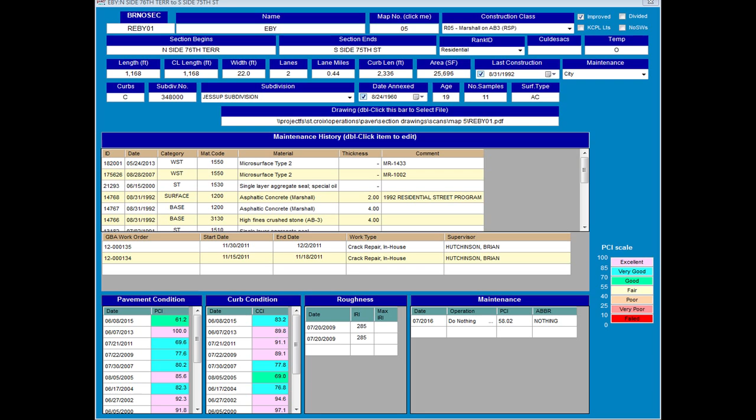So for that section we just looked at, this is a condition plot over time. The x-axis is years starting in 1970. We don't have any condition data until the mid-1980s, so that's why the red line goes horizontal across the top. There's a purple vertical line right in the middle of the plot, and that was a reconstruction of that street. And you can see in this particular example, the reconstruction was very effective.

The red dashed lines near the right part of the plot are microsurfacing treatments. So you can see as the treatments are applied, the impact it has on the street condition. And what we found with our microsurfacing experiment was it was a bust. It wasn't effective, so we stopped doing that.

And on the right side of this plot is the now line, which is today. There's a condition point to the right of it, which would be in the future, and that's a projected condition. And you can see, even on that little short line there, that model is actually fairly accurate for this street section. It tracks pretty well the condition over time.

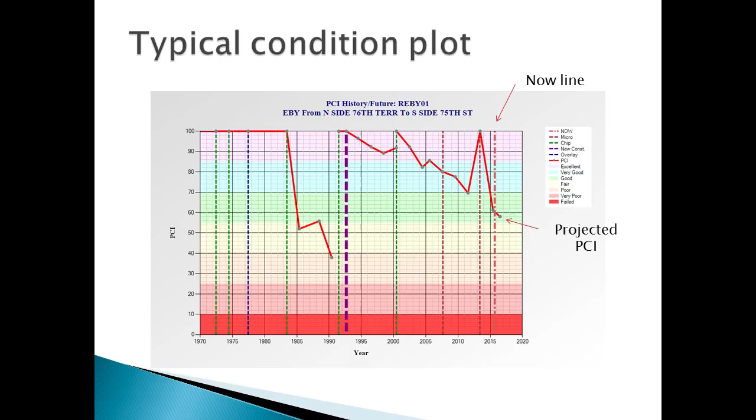There's a spike because the PCI was measured a week after the microsurface was applied, so you got that blush of goodness that rapidly went away. But that's a typical condition plot.

We photograph every sample, and we added that to the application because we could. It's an Android. It's got a camera. It's got GPS, so we're capturing GPS data. And we go, what the heck? We'll take a picture of the sample as they inspect it.

Turns out that is one of the best tools that we have to actually take photographs of these streets as they are inspected. So we photograph every sample, and again, we're doing about 15%. A sample is about a 100-foot hunk of road. So we might do 3, 4, 5 on a typical residential street section.

The measurement process we do with engineering students, recently mostly from KU and K-State, although we'd welcome Rolla, UMKC, anybody else that wanted to work for us over the summer. Last summer we hired 10 college students, 8 of which were Paver inspectors, and we pair them in teams of 2. We rotate their partners every week so as not to introduce bias between the teams.

And at the beginning of the summer when they start, we spend about a week calibrating the teams. We go out and inspect the same street sections. We pick streets that would have a fairly rich set of distresses, and Paver has 19 asphalt distresses and 19 concrete distresses.

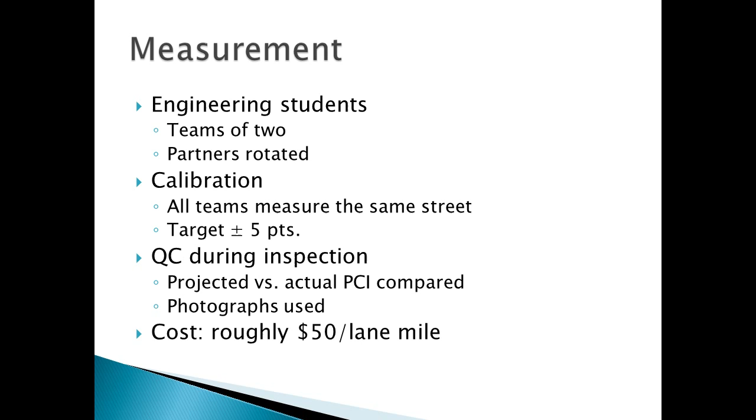In terms of Overland Park's pavement preservation philosophy, our philosophy is that you need to, number one, keep your good streets good. Secondly, you need to identify streets that have been used beyond their useful life.

Are you guys mostly DOT guys? City guys? Any city guys? Am I the only one?

One city guy. Thanks. I think DOTs generally, when they design a highway, tell me if I'm wrong, you design it for a design life, and then you probably operate it for that design life, and then your state legislature makes you operate it for another half again of its design life. So in Kansas, that's about 30 to 45 years for a highway. Cities, given the budget that we're given to rebuild them, you design a road and you build a road, they expect it to last about 300 years.

So we have a number of streets that have gone beyond their useful life. We have a number of streets that have survived for reasons that we as engineers cannot explain. And then our third priority would be to rebuild as the budget allows. Streets that have lived beyond their useful life, we rebuild those. The problem that most cities have is the politicians say, well, this street is terrible, you need to rebuild it. You spend all your money rebuilding the street and then let your good streets go bad, so that all of them need to be rebuilt.

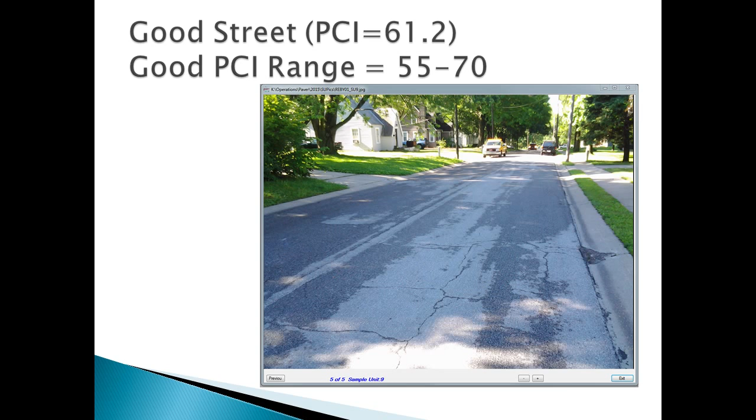Our analysis, again, is focused on keeping our good streets good, developing models that allow us to project what condition would be, looking at the database of streets that we have, and making sure that the streets that have not failed stay in that good range. So we look at streets that are getting down to 60, 55, and make sure that we put surface treatments on those before they drop below that level.

And we have deterioration rate models for each class of street that we have. I think we have 20 classes of streets that we've identified, and each one of those has a fitted deterioration rate curve, and that's part of the modeling that we do.

The maintenance criteria that we use generally are we look at the age of the street, its condition, the priority, which is in a band. If you're looking at good streets, the ones that are near the bottom of the good band are higher priority than the ones near the top. And then we can apply the budget to the model and have it run through the model until it runs out of funds.

It would be nice, well, maybe it would, if a computer model could give you the answer to life's pressing problems, including what streets need to be maintained. It never works out that way. So if you're maintaining all but one street in the neighborhood, you will be in big trouble. So if we're doing all but one of the streets in the neighborhood, we'll do the other one even though it may not meet the modeled criteria. And I say one, but it's more than that.

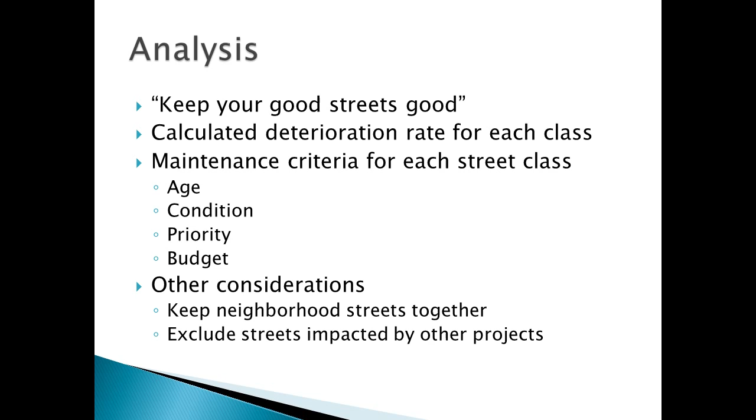Our primary pavement preservation treatment is chip seal. Overland Park started chip sealing in the 1960s. We chip sealed up until the mid-1990s. A subdivision in Overland Park that had high-end houses and transplants from California complained bitterly about how terrible the chip seal was. They didn't spend $750,000 on their house to have a gravel road in front of it, and so they killed it, and we went to microsurfacing.

But we have demonstrated through our pavement management system that chip seal is a very cost-effective and effective treatment, and the one that we replaced it with was not. So we use chip seal as the primary treatment for all non-thoroughfare streets in Overland Park that have a speed limit less than 45 miles an hour.

We're currently using a 3/8 by number 4 chip. This year we got it from Iron Mountain, south of St. Louis, and we would allow the granite that comes in from Arkansas. We're using a 60% embedment with, Kansas calls this a CRS 1 HP, but I think everybody else on the planet calls it a CRS 2P, 65% emulsion.

Preparation for that is, if it's a good street, we do base repair. If we find alligator cracking, we'll cut that out and replace it, and then seal any cracks that are 3/8 inch or wider, which is, I think, where you can stick a number 2 lead pencil in the crack, and we seal it. And then we mill the pavement markings prior to the chip seal if it has pavement markings.

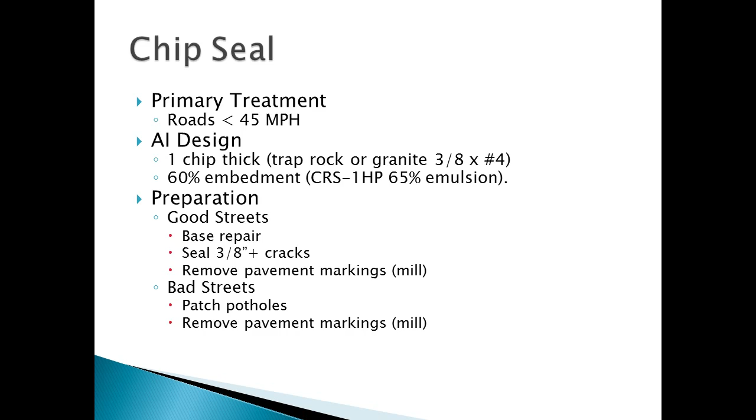Another treatment that we use is just an asphalt overlay, and we limit that pretty much to good streets that are 30 years old. We do not overlay bad streets, because then you just spent 10 times what a chip seal costs on a road that'll look bad in about 3 years. So it doesn't make any sense to spend a bunch of money on a thin asphalt overlay if you don't have a base underneath it that's good. So we analyze the street and make sure it's good before we overlay it.

The prep for that, again, is to do base repair. We do replace bad curb. The ADA requires you to build ramps where they're deficient, so we do that. And we mill the street to restore the original design section. Chip seal tends to distort the shape of the road.

Our asphalt is a 60 revolution Superpave. Typically it's 12.5 millimeter nominal aggregate size, and we allow up to 35% RAP. That's worked out really well for us. It's a good product, and that's what we use for new construction.

For our thoroughfares, we have gone to UBAS. We do overlay, but the primary thoroughfare treatment is UBAS. And there again, we look at roads that are thoroughfares where it's been 8 years or so since they've been treated at all, or 10 after an overlay.

The design we're using is pretty much a KDOT standard design. We mill, we call that texturing actually, so as not to confuse the ADA, but we texture the surface of the road to receive the treatment and then place it. UBAS is a very open graded mix. We try to get it where you don't have water ponded at the curb side, so we raise it slightly above the curb lip. That's been a really good treatment.

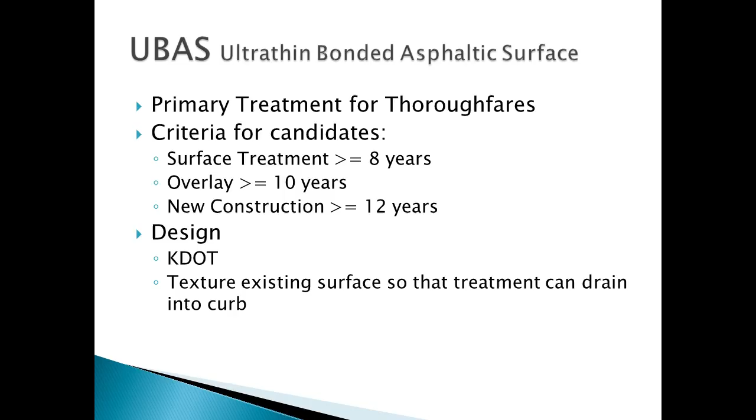Those roads are the smoothest roads we have in Overland Park. The UBAS, even years later, are smoother than brand new asphalt, according to our roughometer.

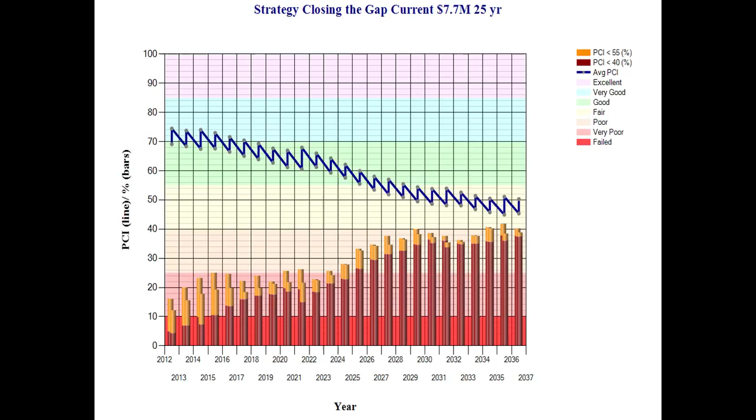If we bump that to $12 million, it stabilizes it. We prepared these graphs during the middle of the recession that we're, I think, slowly climbing out of right now. And that was the justification that we used to sell the city council that they needed to increase the maintenance budget, and it's effective.

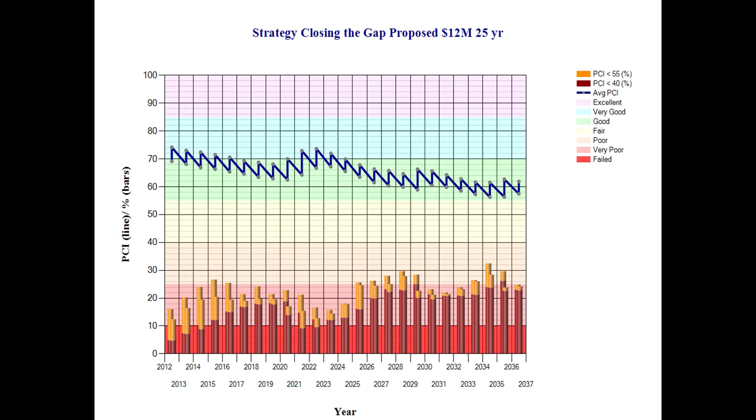So if nothing else, having a good pavement management system is beneficial from the standpoint it helps justify increasing maintenance budgets with models that are real, that show a real effect. So in terms of pavement management, having a pavement management system allows us to measure the condition of a road network in terms that are repeatable and accurate.

In our case, because we did curbs starting back in the late 80s, we were able to demonstrate that the concrete we were using was not durable, and we changed the concrete spec in Overland Park to require a hard rock aggregate, which has saved us countless dollars in curb replacement. The local limestones, I think, were quarried out in the 1960s maybe, and what was built during the 70s, 80s, and 90s is not freeze-thaw resistant, and in Overland Park we found a lot of it that failed pretty quickly.

It also allowed us to demonstrate the benefits of chip seal over micro. Trained pavement engineers, people that do this for a living, can recognize flaws in pavements. Politicians and people that live on the street don't. So having a system that gives you a measure, it's like going to the doctor for an x-ray. They know what it looks like, it's repeatable, it allows you to measure things.

Our pavement management system has eliminated politics. Our council people ask questions, but they don't question the validity of the process. So you can demonstrate if you spend money in this area, this is the benefit that you'll get from it. If you let that go, this is the result. So having a pavement management system is a very important element for local street maintenance. And it gives us feedback.

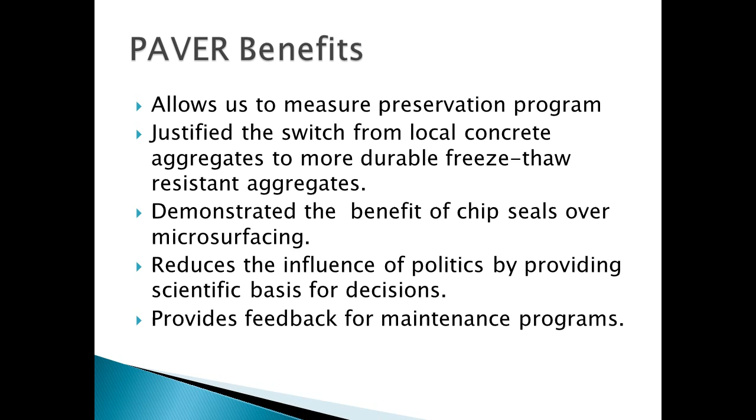If we try a new product, we can look to see the impact that it's had on our street network. So when we went back to chip seal, we used a smaller aggregate, hoping it was more palatable to the residents. And we found that the smaller gradation wasn't as effective as the gradation we're currently using. You can get that kind of feedback pretty quickly. So that's it. Any questions?

The question was, what kind of hard rock aggregate for our concrete did we switch to? The answer is there's several approved hard rock sources. There's Granite Mountain that comes out of Arkansas. It's actually a nepheline syenite, it's not a granite. There's Meridian Granite out of Oklahoma.

There's Pink Quartzite that actually has left the Kansas City market now, I understand. Recently, the Iron Mountain Trap Rock has re-entered the Kansas City market. Kansas City, Missouri used it for years downtown. It's back now. And we would approve the Lincoln Quartzite out of central Kansas, but nobody's brought that in to us.